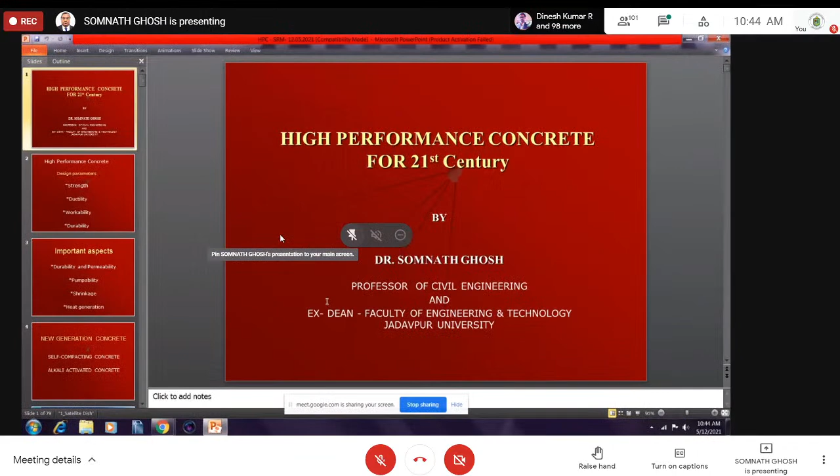Just a moment. Start, sir. Thank you, sir. You can start now. I have to first share... Can you hear me? Yes, sir. It is visible, sir. You can put it in slideshow mode, sir. I'll do it. It is now visible correctly. Thank you, sir. You can proceed, sir, please.

Thank you very much. Thank you to SRM University, because basically this college is under SRM University. When Professor Prabha requested me to deliver a lecture, I accepted it because I know that SRM is a good group and they are doing good work. Let me participate in an event with them.

Now today, basically I'll discuss high performance concrete. And frankly speaking, my focus will be towards the 21st century.

Now, when we are talking about high performance concrete, we really consider these parameters. There are many parameters, but out of all the parameters, these are the most important: strength, ductility, workability, and durability. These are the four parameters you all know. But many times we don't consider durability or ductility. We only concentrate on strength and workability, even in research.

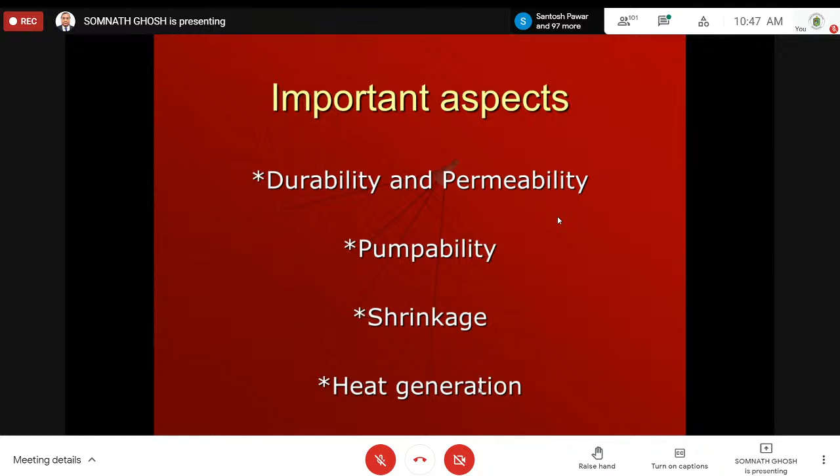Now, when we talk about new generation concrete at the present moment, we normally refer to self-compacting concrete and alkali activated concrete. There are other types of new generation concrete also, but today I'll just discuss these two areas.

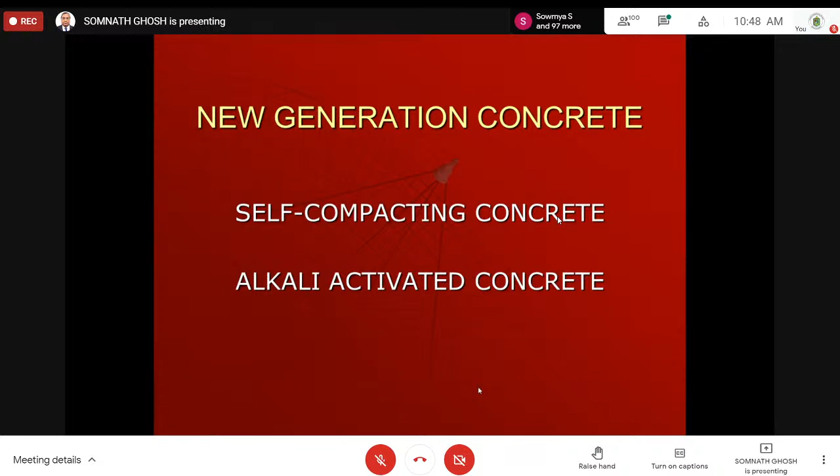Now, first, self-compacting concrete. Many of you have heard about it - what is self-compacting concrete. You all know that where the reinforcement is extremely congested, it is very difficult to compact the concrete, even using high pressure.

So in that case, if you can place a quality of concrete which can easily go through the gaps between the reinforcements, even if they are small - because in many situations you will find that at the column-beam junction, the stirrup spacing is maintained at 75 millimeters to make it earthquake resistant. But if the concrete is not going inside the joint, then whatever you do for the remaining part of the structure, your purpose will not be served. So definitely you have to pour the concrete in such a way that it goes to the inside portion of the beam-column joints and other portions also.

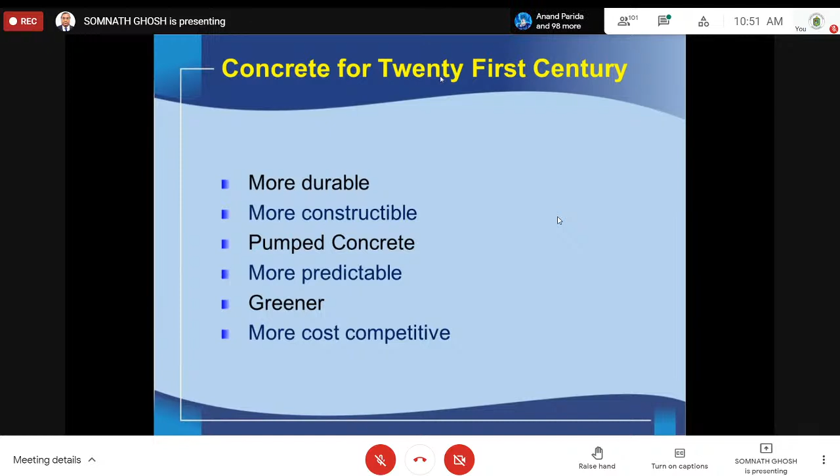Then it should be greener, because the process should be such that carbon dioxide emission and other things can be avoided, and more cost competitive. Because whenever we go for this kind of concrete, it is in everybody's mind that the cost will be more. That is the challenge you have to accept, and you have to make the concrete cost competitive.

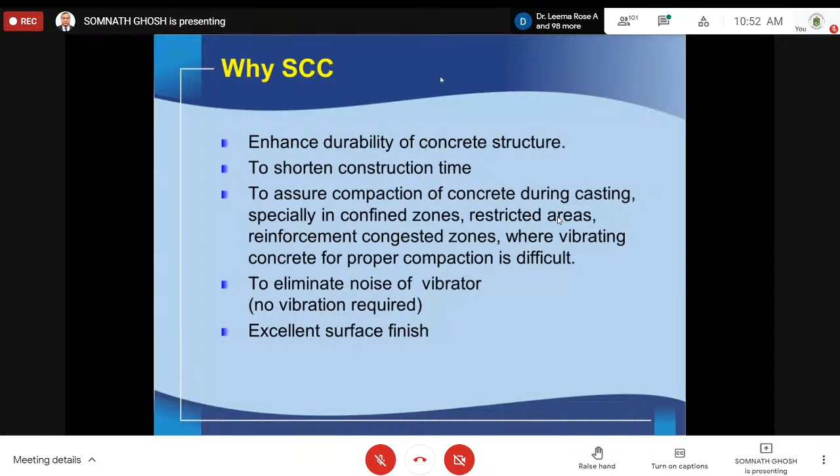Now you see, if the durability is enhanced, obviously it is welcome. And if you pump the concrete and take it to a particular height, like you are supplying water, you can just place the concrete, no vibration is required. So it shortens the construction time. In confined zones, restricted areas, reinforcement congested zones, this kind of concrete is very good. As there is no vibration required, there is no noise problem. And at the end of the casting, you can finish everything properly. Surface finish will be excellent.

So the economic consequences: constructability is important, predictability is important, then controllability and increased service life. Constructability, obviously, when I gave you the example of high-rise buildings, there you have to make the concrete in such a way that you can pump it to the highest level. This kind of concrete is very complex.

Even if the water cement ratio is slightly different from what you recommended, in that case you won't get that. So before you produce it, you must be able to predict its workability, strength, and other engineering properties properly. So predictability is important, not just trial and you are doing something. No.

Controllability, obviously, and if you can go for a highly compacted concrete, then the aggressive agents in the environment will not be able to penetrate through the concrete, and the service life of concrete will be more.

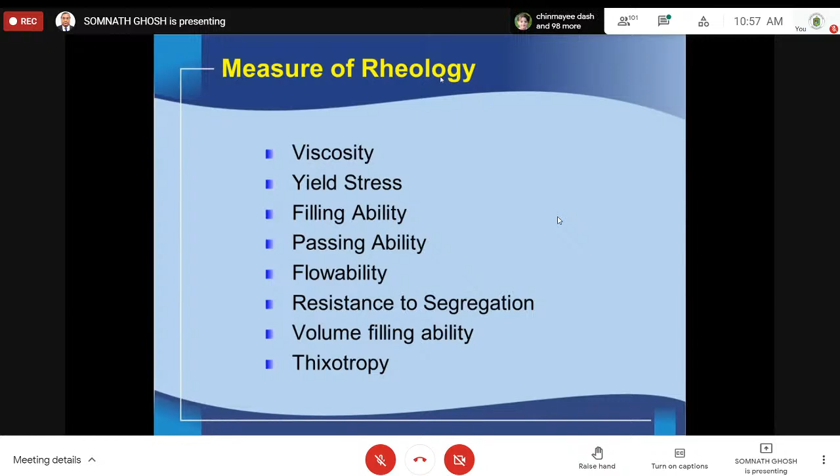Suppose when concrete is flowing, fresh concrete, at the same time setting is also taking place. So as time goes, the workability of concrete is also reducing. But at which rate? How can I define that? Whether the workability is reducing very fast or low - this kind of thing you can express in thixotropic terms. I'll discuss this. Now you see this composition of self-compacting concrete.

The mineral admixtures like fly ash or silica fume are added. Then water must be there. Chemical admixtures, as you all know, many different types are used - high range water reducing admixtures, superplasticizers, and most important, viscosity modifying admixtures. Fine aggregates, obviously, and coarse aggregates. So these are the basic ingredients in self-compacting concrete.

But don't think that whatever you are seeing in the slide is restricted to that only. There are many things, but it's not really possible to discuss everything within one hour. My ambition or objective is to give you an overall idea so that you can think about it, go into the detail of it, and then slowly you will be a master in this particular subject, and you can work with many people and develop many things.

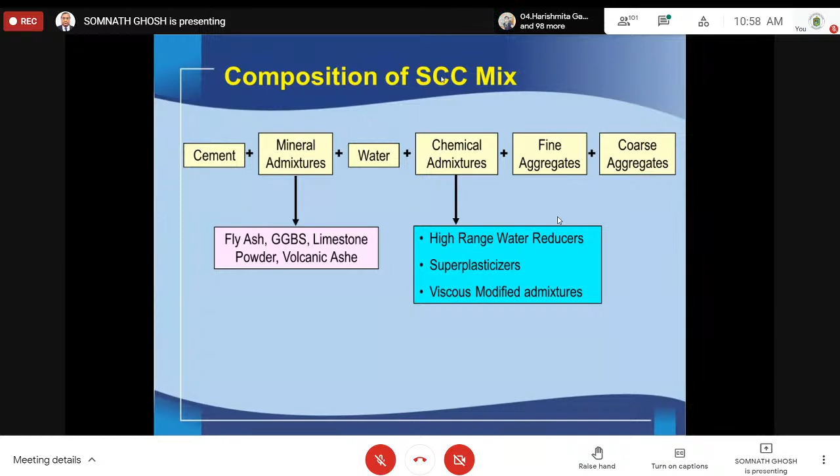Now you see the composition - I told you that powder, the fine aggregate below 90 micron. If you go for very big particles, it will not always give you self-compacting concrete. Now even micro mortars, we are going for self-compacting - particles like below 125 micron. And other things, water and admixtures are there.

Now try to understand the fundamental approach towards achieving self-compacting rheology. You are limiting the coarse aggregate content, so it is related to segregation resistance. The superplasticizer you are using gives you fluidity - it has relation with segregation and relation to fluidity. If the material is segregated, you can't use it.

Then if you go for a very high water cement ratio, you can't really produce cohesive concrete - it will be segregated. Naturally, if you take all these things together, they interact with each other, and only then can you achieve self-compactability. Otherwise you just can't, because here it is just like a fluid. Concrete is just like a fluid - the slump etc. you can't compare to conventional concrete.

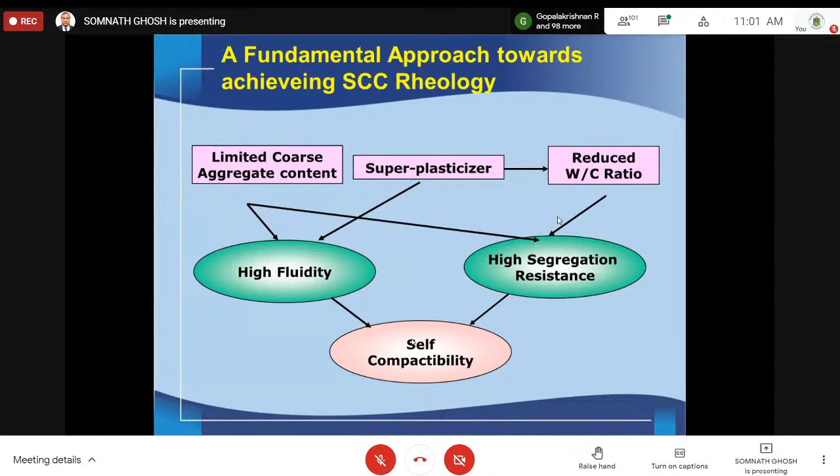Even if you can't measure slump, it is just like fluid. But you will be able to achieve it at a very, very low water cement ratio. Obviously superplasticizers and viscosity modifying admixtures have a very important role. So you have to procure these things and cook it properly - then only will you be able to achieve self-compactability.

Now the aggregate - size, quantity, shape, spacing, interparticle separation, combined aggregate packing - all these things are very important. Try to understand that normally the particle size of coarse aggregate is bigger than fine aggregates, and the particle size of fine aggregate is bigger than cement. Again, the particle size of mineral admixtures like silica fume is much less than cement.

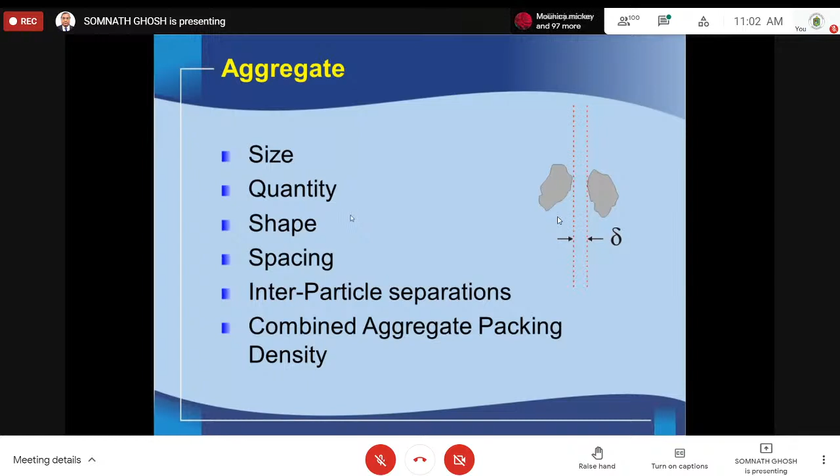So what is happening - the interparticle gap between the coarse aggregates is taken up by sand, then the interparticle gap between sand is taken up by cement, and the interparticle gap between cement is taken up by these mineral admixtures like silica fume. In this way you will be able to achieve a very dense concrete. That is what I am saying - packing, which you can express in terms of density. These are very, very important aspects, normally not really discussed or understood or used properly.

Now these are very important aspects - superplasticizer, obviously high range water reducing superplasticizer, viscosity modifier, microfine particles like silica fume, fly ash etc., and low water cement ratio, low. If you go for high water cement ratio, you will not be able to achieve self-compacting concrete.

It's a tailor-made concrete. Why tailor-made? Because your client may ask for a particular strength, particular workability, particular durability, and many other aspects like pumpability, and you have to develop accordingly.

So obviously, hand mixing is not at all possible. If you try to do it by hand mixing, you will not be able to achieve self-compacting concrete. So use of a mixer machine is very important.

So you see, when people are coming to a particular person for mix design in the profession, one can provide a mix design at a very low consultancy fee. But when the requirement is different, like self-compacting concrete with pumpability and other things, obviously that person should be a real expert, and maybe your consultancy fee will be more. But the advantage is that with a little bit more expense on the consultant, you will be able to achieve a much better concrete, which ultimately will benefit you.

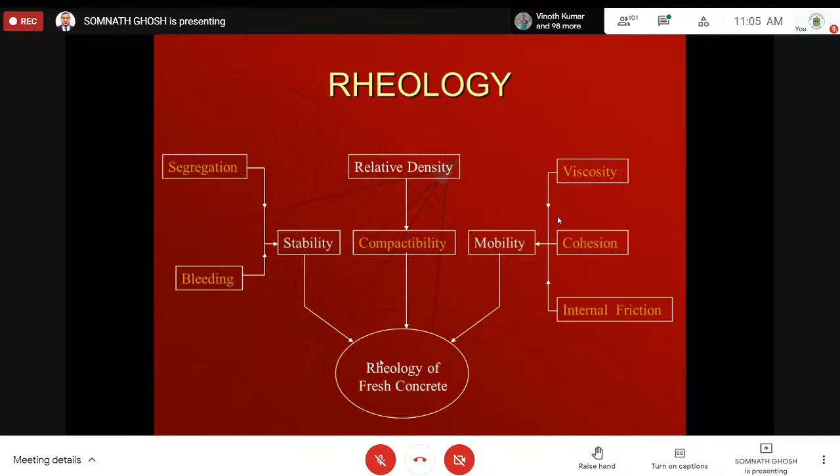Now the question is that when we go for normal concrete, then the minimum cement content is specified in the code. But when you are going for this kind of high performance concrete or self-compacting concrete, then you are adding fly ash also, and many other things. Fly ash indirectly is also a kind of binder, contributing as binder. So that you all know. So this is just an example.

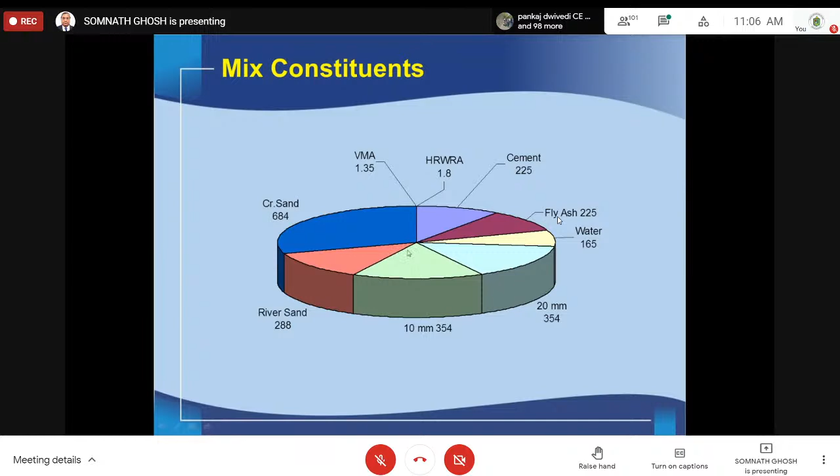Now you see, you have to measure the rheology in the field and also in the laboratory. Then the slump flow or T50 flow, V-funnel, T5 minutes, J-ring, U-box. There are about 10 such methods which are normally used in research, in the laboratory. If you consider the rheological aspect in detail, it may be much more than that.

But at least in the laboratory or in the field, you have to use these 4 methods. This method gives you filling ability. This particular slump flow method is also filling ability, J-ring for passing ability, V-funnel, like that. So these are the different tests, and they are giving you these properties, which are very important.

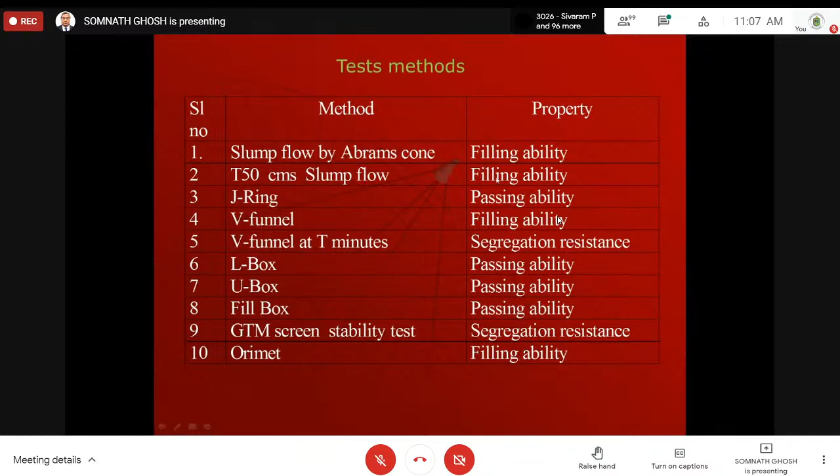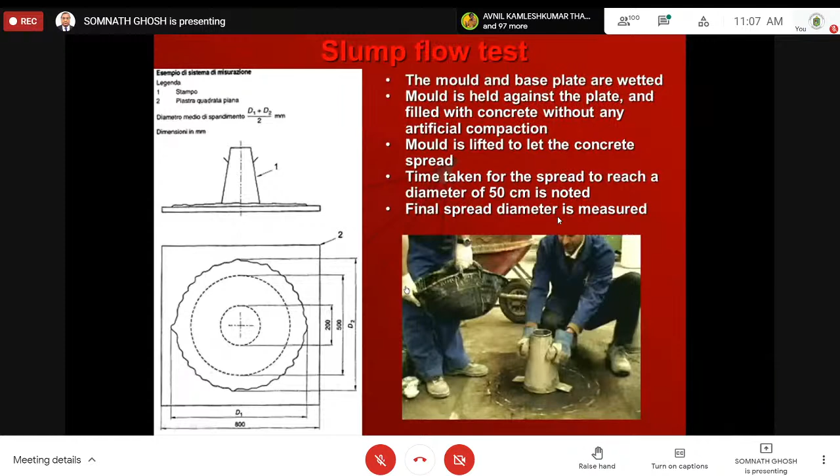And you see, this is a kind of test, the J-ring test. It is very similar, these kind of vertical rods are provided as if the concrete is passing through the reinforcements. So this is the cone, you are filling the concrete here, and then when you are lifting it like this, then the concrete is flowing, passing through these vertical bars, like reinforcements. And ultimately what is the flow that we are measuring? What is the diameter of the flow that we are measuring?

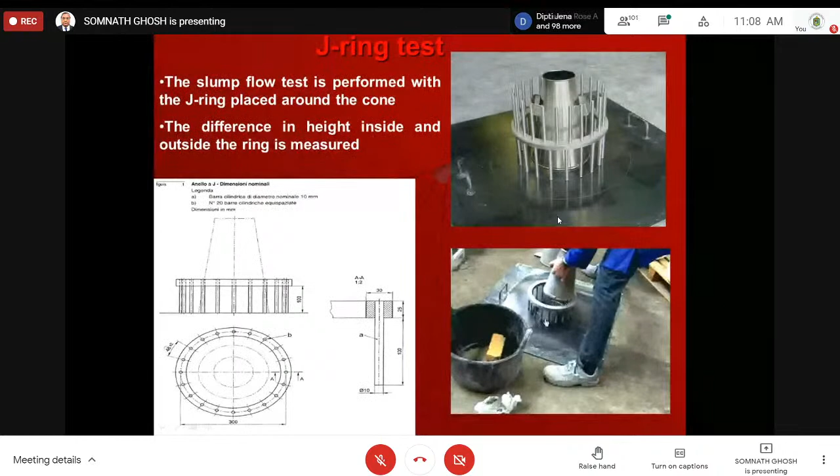Now you see, this is another kind of test, the U-box test. If you block it here and fill with the concrete, and then you remove the shutter, then what will happen? It will come this way. But if it is water, then both the levels are same. In concrete it is not like water, so there will be some difference. But if the difference is less, and if the concrete is cohesive, that means it will give you the self-compacting property. So this is another kind of test.

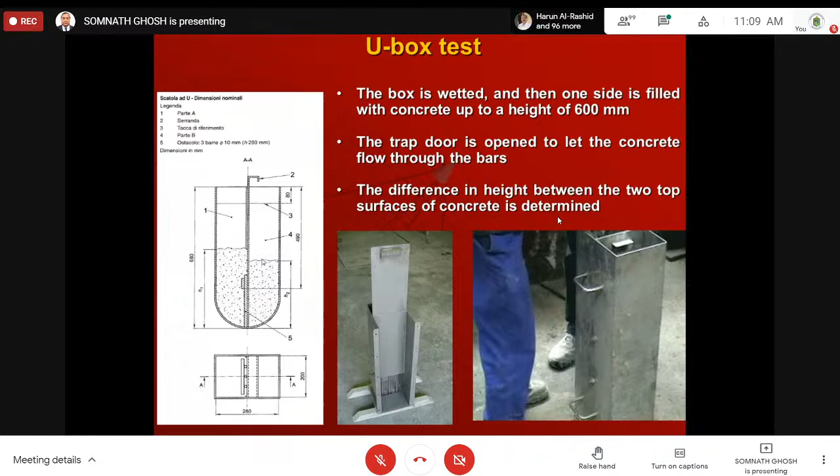Now you see, we have tested several mixes in the laboratory for so many years, because I am in this profession for 40 years, and our particular concrete technology group is very strong in the country. So these are the tests we conducted long back in the 90s. At that time we achieved all these things. Now it is even better.

So you see, this is the coarse aggregate, fine aggregate, then the GGBS slag, silica fumes, metakaolin, like that. I have given you the quantity per meter cube, and the superplasticizers, viscosity modifying admixtures, how much. So like that, there are different types of mix, C0, then FL2, FL1, right? So if you go through this slide, you will understand that I have changed these quantities.

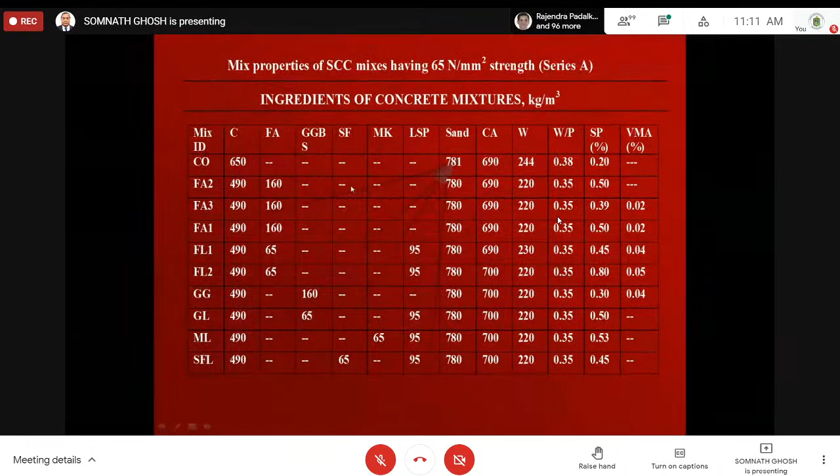In many places I have not used it. Ultimately, this particular test I did in Series A, and again with that knowledge, we went for Series B - S1, S2, S3, different kinds of mix. All these things are varying, so you can play with it. Ultimately, at that time, we could produce up to M60. Now we can produce even higher strength of concrete.

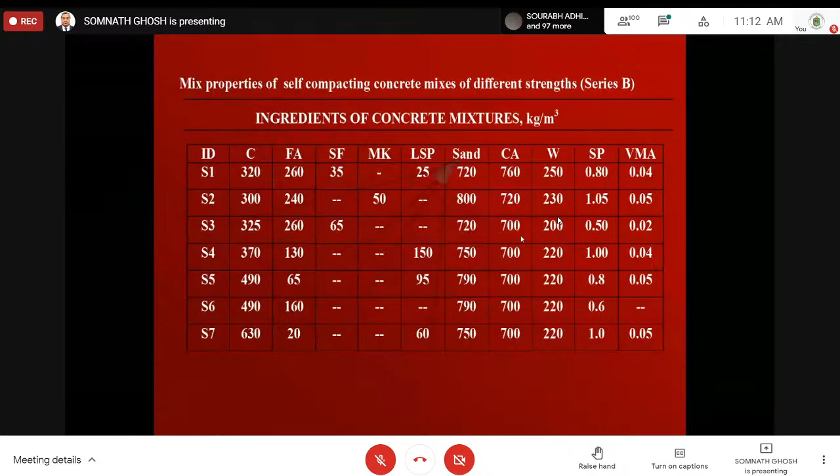If you're expecting very high strength, then there are other problems also coming. You have to take care of those things.

When we are trying to achieve self-compacting concrete, you have to understand the compatibility of the ingredients - cement, sand, stone chip, admixture - and whether they are compatible or not. If every member of a group is very compatible with each other, that group becomes very strong. Same thing here.

We are not checking it - we are using a particular superplasticizer or viscosity modifying admixture with a particular type of cement, and it is not compatible. So a particular type of cement is compatible with a particular type of viscosity modifying admixture or superplasticizer. You have to first understand whether the ingredients are compatible, then select them accordingly. Then all the ingredients are compatible, and it will give you a very good self-compacting concrete, just like members compatible with each other make the group very strong - the performance will be extremely good.

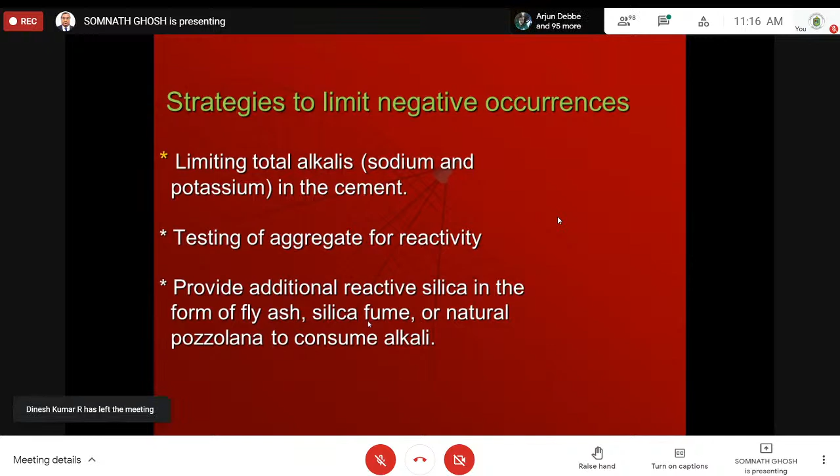Now, other problems: inadequate compaction resulting from segregation, micro cracks resulting from shrinkage and thermal stresses - you have to be very careful of these, otherwise there will be huge shrinkage cracks initially. Then bleeding is another problem - if you keep the concrete in a particular place, you will slowly find that even if you do nothing, water is coming out from the concrete. The concrete should be able to hold the water given to it; if it comes out, it will become harsh.

Then volume of pores and capillaries is to be controlled, then distribution of pores and their discontinuity. If there are pores and the pores are not interconnected, that is bad. It happened at the Eurotunnel that the concrete was very good, high performance concrete, but the interconnection between pores was not there.

As a result, when the temperature rose to a great extent due to a fire, the water entrapped within the concrete produced vapor, and that vapor produced huge pressure inside the concrete, and ultimately the concrete burst. That happened to the Eurotunnel a long time back.

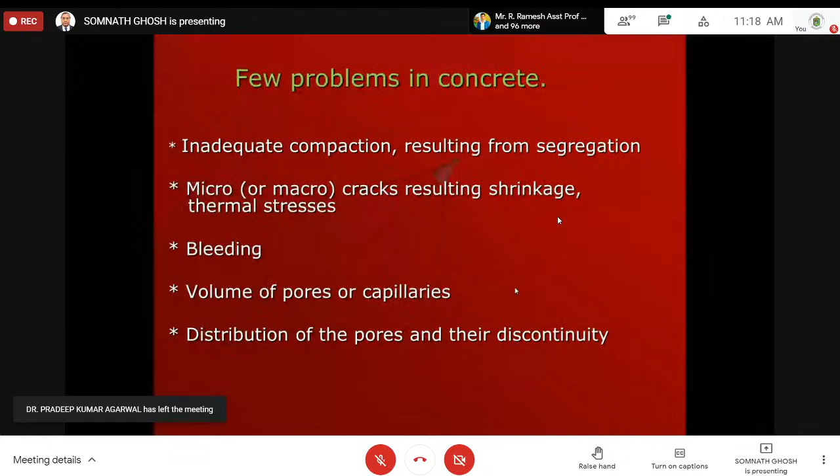Now, the reduction of permeability - if you can reduce the permeability, that means the durability will be more. Suppose the concrete is in a saline environment, or in an acid or alkali environment - if those things try to percolate through the concrete, and if it percolates, then what will happen?

The bond between the aggregates will be disturbed, the interfacial zone will be disturbed, and if that interfacial zone is disturbed, everything is disturbed. So the property of the interfacial zone actually contributes to the property of concrete. If concrete is ductile, the interfacial zone is ductile. If the concrete is of very high strength, then the interfacial zone is of very high strength. The particle size at the interfacial zone is very, very small, at the nano level, so you have to understand the interface.

So earlier people did research on concrete and mortar, now people are doing research on the interface. Not now, long time back, researchers knew that if they could improve the interface between the particles, that means they are actually improving the concrete properties.

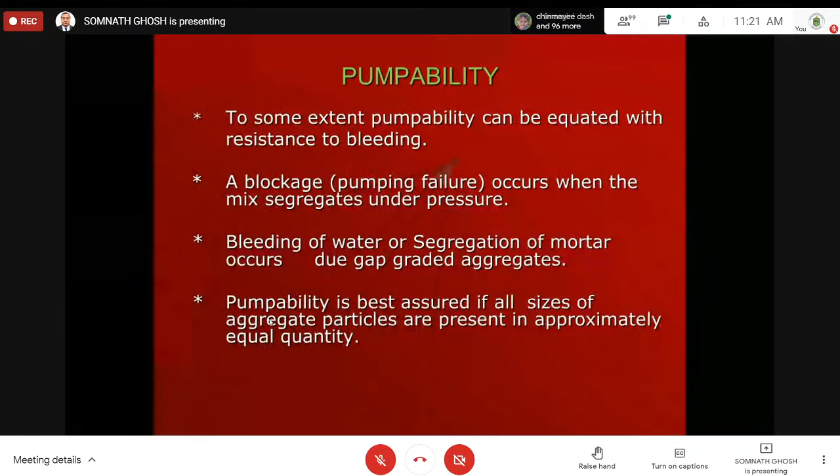Now you see that you will be able to produce a very good pumpable concrete if all sizes of aggregates are present in the concrete more or less in equal quantity. I'm not saying exactly equal, but more or less. That will give you packing, and you will achieve cohesiveness through use of viscosity modifier admixtures. You can also reduce the water-cement ratio by using high range water superplasticizers. So all these things you can do. Keep this in mind.

Shrinkage also, drying shrinkage and carbonation shrinkage, you don't want it. You have to take care of the aggregates and also the paste. That's very important. You cannot allow loss of water because that will lead to high shrinkage. Shrinkage is largely dependent on total quantity of water in the mix; if it is less, shrinkage will be less. Also the modulus of coarse aggregate and proportion of aggregates matter.

Now gypsum content of cement influences shrinkage, obviously. So in one way gypsum is helping, but in another way, its presence is not good for concrete properties. So there should be a limiting quantity of gypsum.

If someday I discuss with you only about cement, only about the basic aspects of cement with the reaction mechanism and all, then you will be able to understand better.

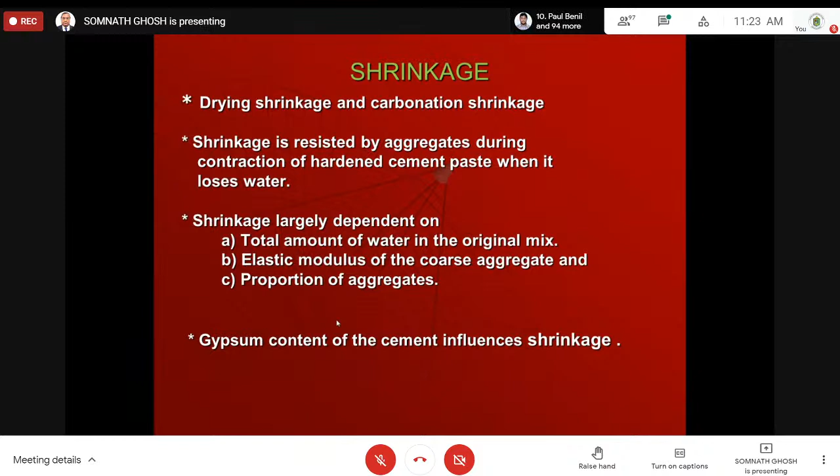Now let us discuss another thing which I told you initially, which will be extremely popular in the 21st century. It has already become very popular in most countries, in Australia, USA, Britain, Ireland, everybody is using it. In our country also, people started using it, manufacturing many things. But still, I must say we have to take it forward in our country. I know many persons are working on alkali activated composites in your university also.

Now you have to understand sustainability, and then you will be able to understand why this change is required, why normal Portland cement could be replaced by something, in order to achieve sustainability.

Now you see that the limestone and all these processes, ultimately what happens? It liberates carbon dioxide. There is some figure given, in energy terms some figure given. But ultimately carbon dioxide liberates, which you don't expect, which you don't want, because global warming is because of the liberation of carbon dioxide. We have to limit it.

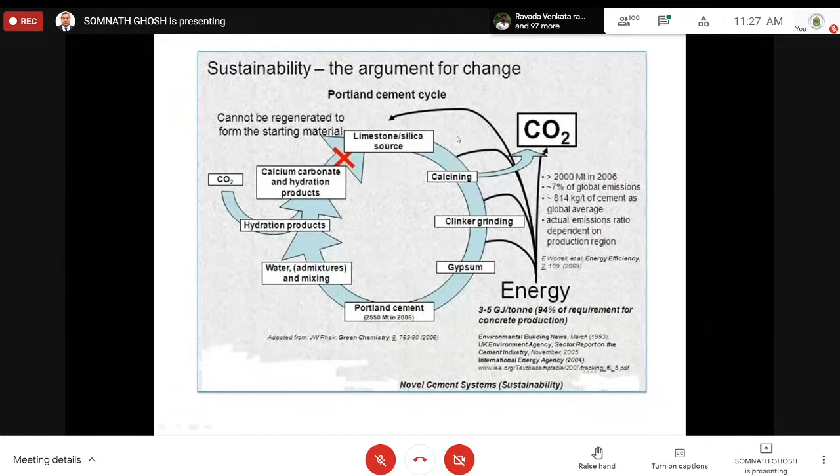Now, the alkali activated composite, what it is, I'll tell you. Initially, this is proposed by a very renowned professor, Professor Davidovits. But initially, he worked in different areas of material, not exactly in cementitious material. He started with other kinds of material, not cement-based materials or cementitious material like we are using, civil engineers are using. Later on, he has contributed in those areas also.

And if you go to Google, you will find another name, Provis. He is a professor in Sheffield University, UK, and he has also contributed a lot, right?

I'll discuss these persons because this is the kind of thing - even throughout the world, very few persons have real contribution towards this particular subject. Even very good books are not always available, right? So I'm telling you that you can contribute a lot in this subject.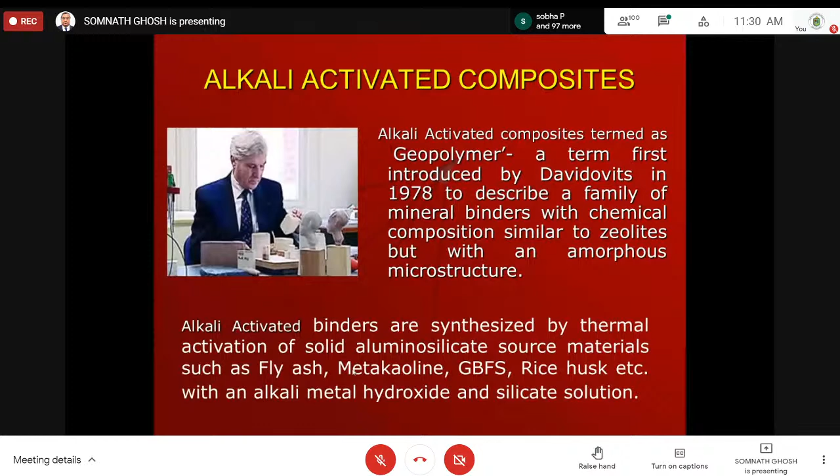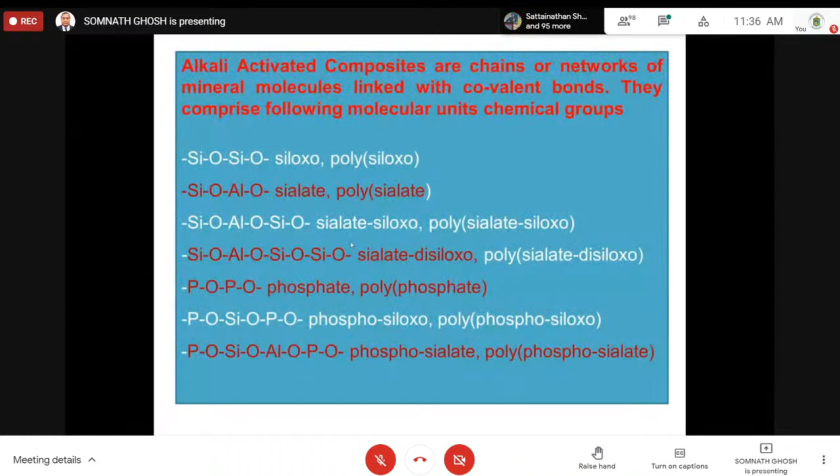So this entire process takes place - it's very easy to understand. Those who are interested to work in materials, in concrete, I think they can do many things - they can just play with it. So this is the process involved in alkali activation.

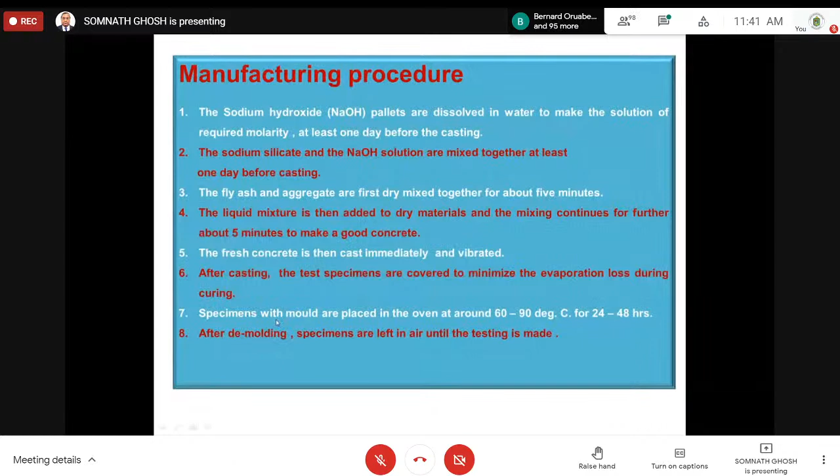Of course, we are not doing it now because of other problems - in winter it's different, in summer it's different. You can do it 3-4 hours before casting. Then fly ash and aggregates are dry mixed together - dry mixing. Then you add all these things slowly. Finally, you place it in the mold, and after a few hours, or maybe after 1 day, you can take the specimen from the mold, and depending on requirement, put it in the oven at 60 to 90 degrees centigrade, maybe for 24 hours, maybe 48 hours. All these things I'll tell you in detail - this is the manufacturing, very simple, very simple.

Then the tests are carried out: bulk density, workability, initial setting, sorptivity, UPV, direct compressive strength, MIP (not normally used, but required here), XRD, XRF, and scanning electron microscope. These microstructural studies have now become compulsory in research. You have to do it, otherwise you can't convince the industry people, as they will ask you several questions you won't be able to answer.

Now, I'll just give you an overview about it. But I have written 3 books on this subject available on Amazon, and a recent book published by one of our very bright research scholars, Kushal Ghosh, with CRC, Taylor and Francis group. He has concentrated on fly ash and slag, but you have to go through those books if you want all these details. Everything is given there, many other things I won't discuss here. Within a year, I expect to give you one more book on blended geopolymer and blended alkali activated composite.

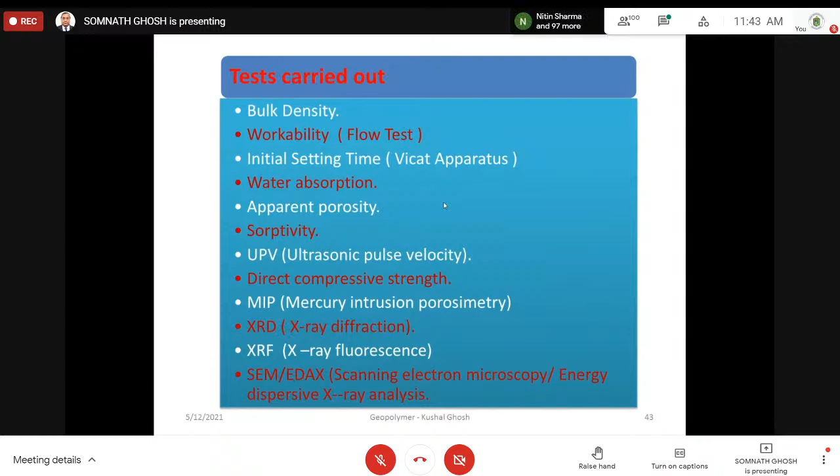Now, this sorptivity test indirectly gives you an idea about the absorption of water through capillary action. Unless you know about the porosity and transmission of water through capillary action, you won't understand how saline water or acid will attack the reinforcement inside. The concrete must be good, the cover must be good, so that it should not be able to attack the reinforcement inside.

This is a very good subject, but I'm not going into detail. I'm just referring to this ASTM code. We have developed methodology and have several publications in ASTM.

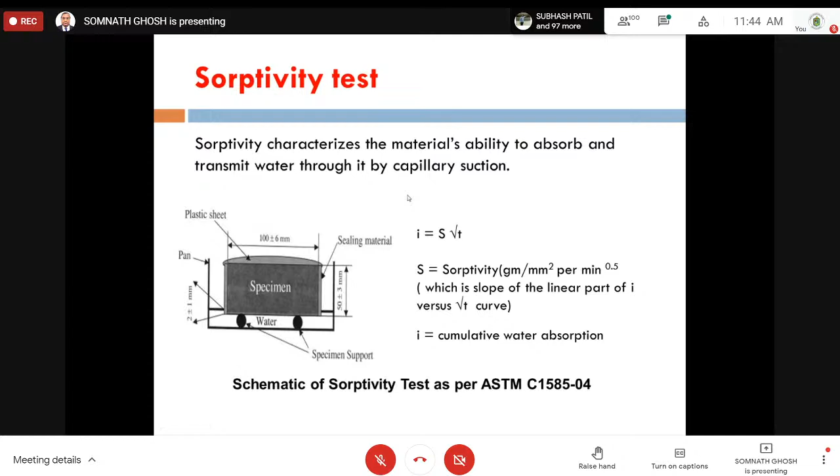If everything goes all right, within a year you will get one more book, where I have related durability, strength, and all these things with sorptivity and absorption of water. These things are very important - unless you understand this, you will not be able to assess durability. We have even developed a model for the durability index, because these are the questions you have to answer to industry people, otherwise they will not accept it. They will not go into the detail of reaction mechanism, but they have their own way to understand whether you are guiding them properly or telling something rubbish - they have that level of intelligence.

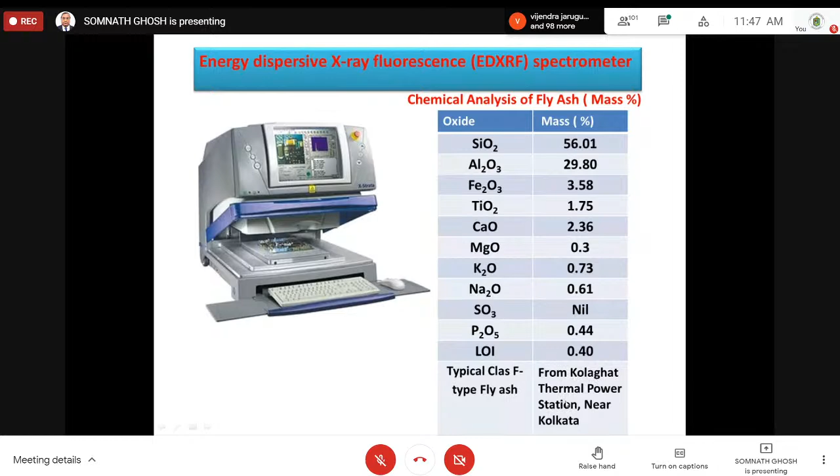So in Delhi, one company is manufacturing this, and they are in regular contact with me. Now you see, this is the chemical analysis which will go for EDXRF, and you will get the oxides and how much mass percentage through this instrument. It's a very sophisticated instrument - you may not have it in your civil engineering department, it may be in some other department or a central facility. Doesn't matter, you go there, give them a sample, and they will do it for you. This is just a result when I used the fly ash from a Kolaghat thermal power station near Kolkata.

UPV, you all know what this is. Here I must tell you that when you get this velocity around, say, 4.5, you say it's a good concrete. But in case of alkali activated composite, you won't get that high a value compared with normal concrete. But still we are claiming it's better - it is dense.

Its durability is high, everything we are claiming is better. Why? Because due to the polymeric reaction, the material cannot be compared with normal concrete. So due to this polymeric change, or the presence of polymer, whatever it is, the pulse velocity decreases.

Pulse velocity is very high in case of metals like steel, copper. But for synthetic material, polymeric material, it is less. But polymeric materials are better. So that's why the kind of ultrasonic pulse velocity test needs to be done, and you have to say that yes, even if you don't get 4 or 4.5, even if you get 3, 3.5, it is good because it is polymeric in nature, showing you less value.

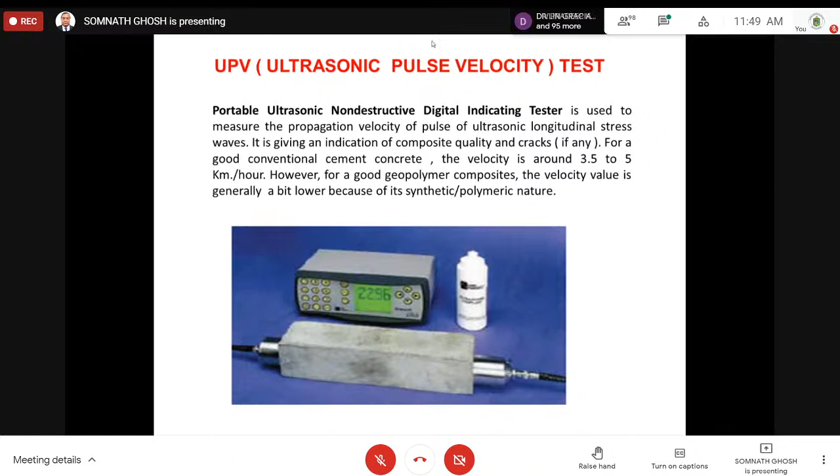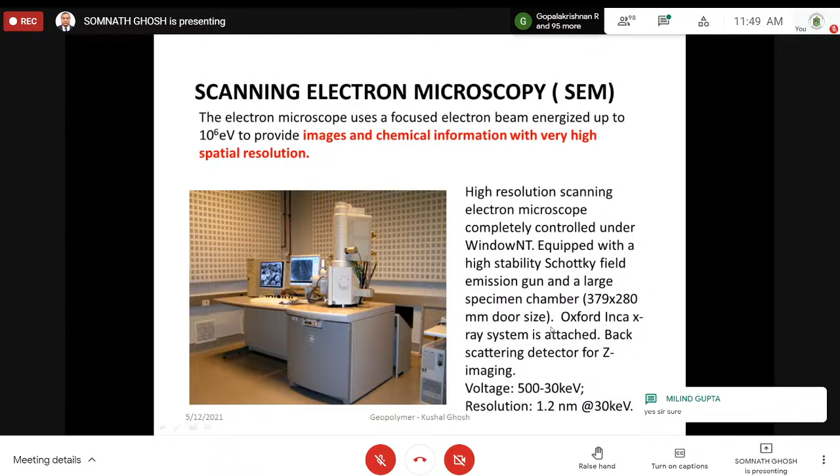Then scanning electron microscopy, this is also maybe a central facility, right? You can understand the microstructures depending on the resolution of the scanning electron microscope. Now you see, just see the microstructure of alkali activated binder.

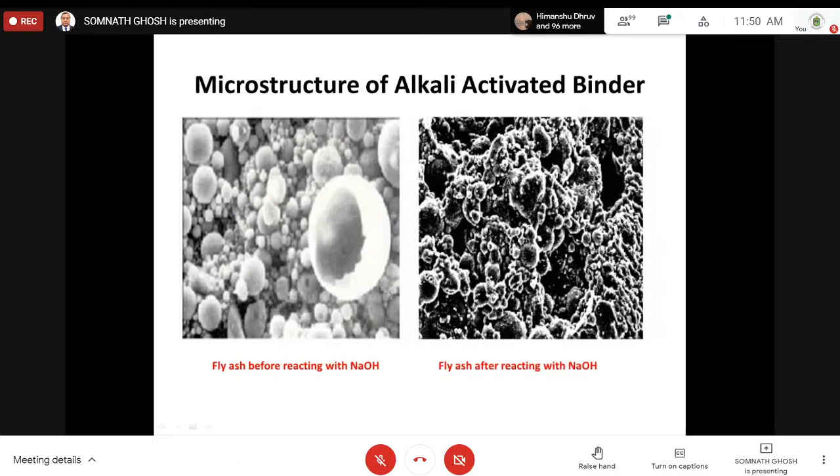See, fly ash before reacting with sodium hydroxide, it is like this. The moment it reacts with sodium hydroxide, it becomes so dense. After formation of gel and all, it becomes so dense, right? These things you can only understand through this scanning electron microscope. Otherwise, you will not be able to understand the microstructure.

Now you see here with different sodium to alumina ratio, one is 0.46, another 0.62. At 0.62 it's much more dense. So from your result, you will get that it will absorb more water. That means the micropores are there much more compared to this. So if this changes, how the microstructure is changing, that one should understand.

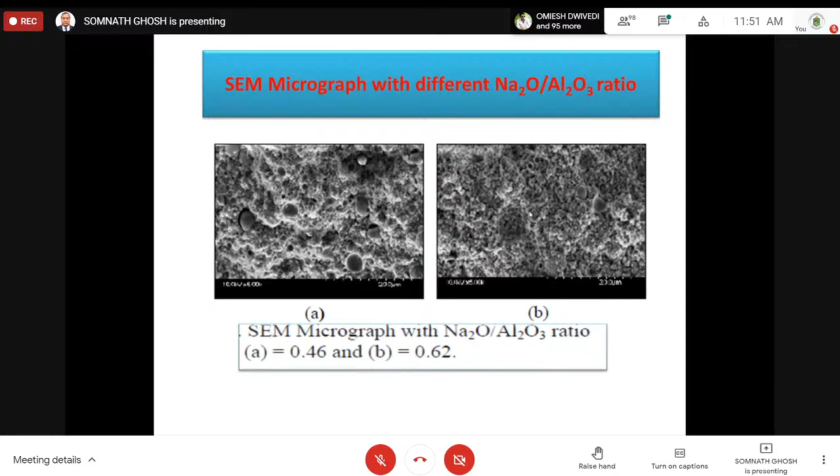That is why this kind of test is very important. And I must say that slowly in concrete technology courses, the microstructural part, you should make it compulsory. Nowadays, if you try to publish any paper in very good journals without microstructural study, the paper will be rejected. You won't be able to publish in most of the journals.

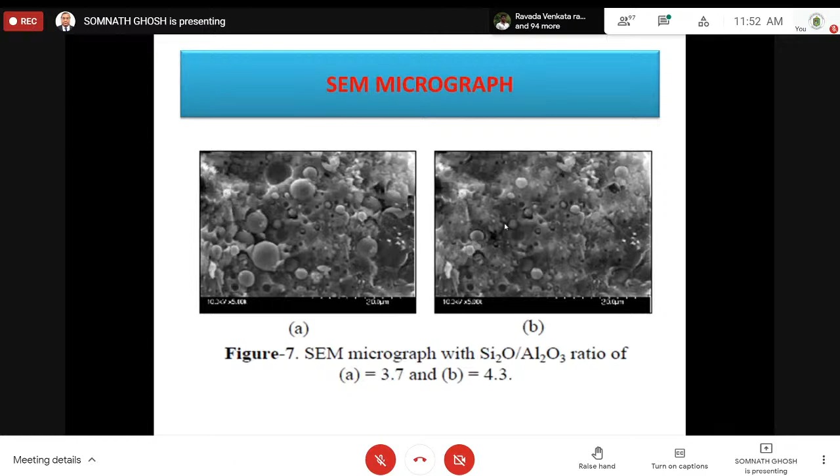Similarly, you see that silica to alumina ratio, if you are changing from 3.7 to 4.3, it is becoming... So these are the things, unless you go for microstructure test, scanning electron microscopy, you can't be able to understand. See, these are the things, right? And the corresponding XRD results are there. So all the peaks will tell you which one is more, which one is less, like that.

Someday we can discuss only on microstructure, that will help you.

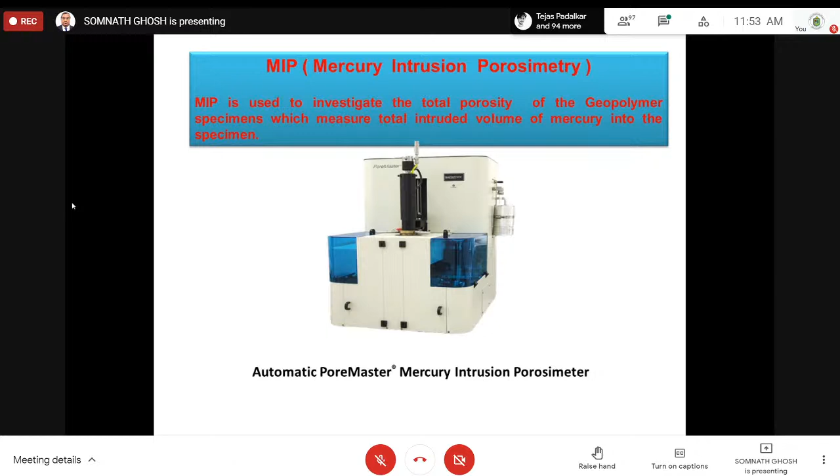Now another test we are doing, the mercury intrusion porosimetry, is very, very important. Very costly. You may have a central facility, but you will be able to understand. So MIP is used to investigate total porosity of geopolymer or alkali slag, which measures the total intruded volume of mercury into the specimen. What they do is try to intrude mercury by putting high pressure, and the mercury is going inside. They measure how much mercury is going inside, the volume of mercury, and from there they try to predict the pore volume, maximum pore diameter, etc. So this is the kind of thing.

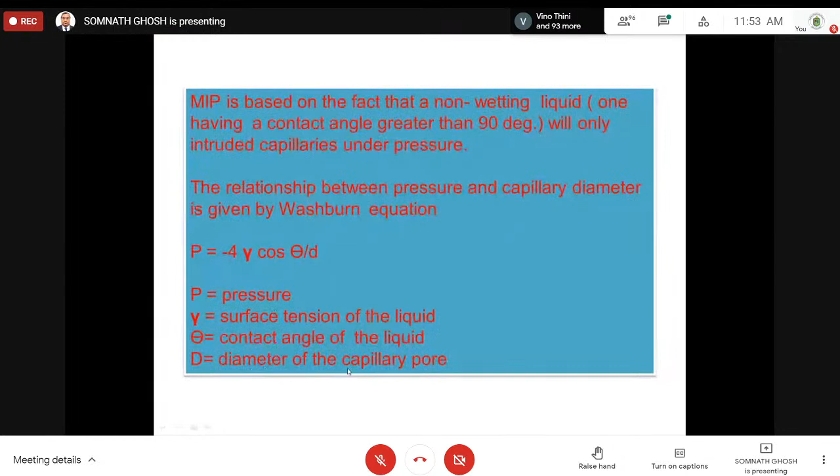MIP is based on the fact that a non-wetting liquid, mercury, having a contact angle greater than 90 degrees, will only intrude capillaries under pressure. And these relationships exist between pressure, contact angle, and diameter of the capillary pore, all these things can be related, right? Very easy, but only thing you have to be careful about.

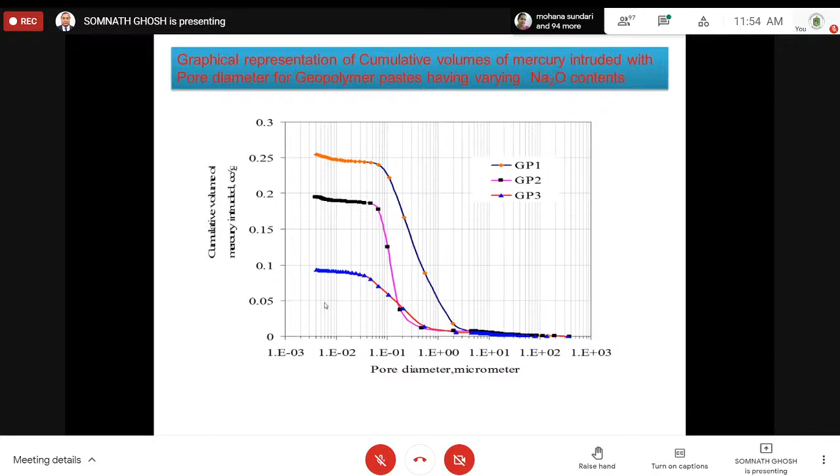At the end of the test, you will get a graph like this, in the computer it will come like this, right? So this is cumulative volume of mercury intruded, and this is your pore diameter. This will give you a very good idea about the presence of pores, pore diameter, and total quantity of pore in the composite. Everything you will get. Unless you understand it, how can you say why that particular material absorbs more water? Because more pores are there. But what is the pore diameter? What is total pore volume? So all these things are very important.

I must be sure whether geopolymeric reaction is taking place at all. Long back, when people added alkali and sodium silicate to slag, blast furnace slag, they used to call it geopolymer. But throughout the world, people said, why are you calling it geopolymer? Why is the polymer term used, because no polymeric reaction is taking place? This happened to me while publishing a paper in ASTM. I went for an NMR test, and through that test, I found there is no trace of polymeric reaction when blast furnace slag and alkali silicate react together. So you must be sure there is a polymeric reaction before telling people that. That's why I now generally use the term alkali-activated.

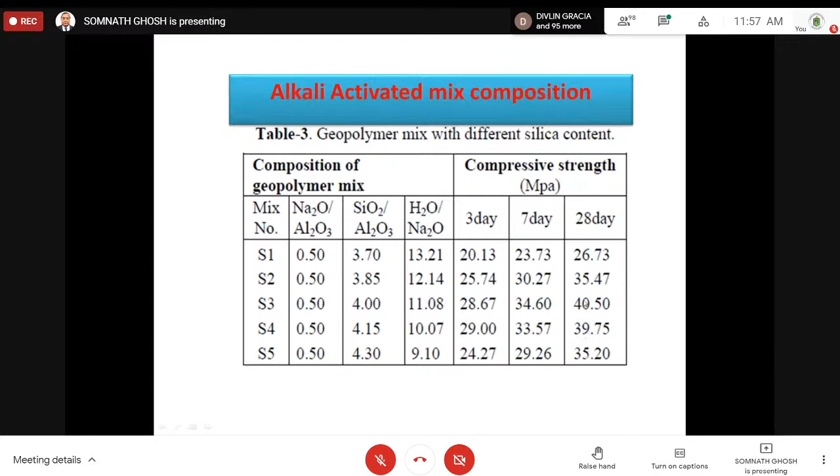Now you see, these results are quite encouraging. With fly ash, alkali and silicate at 28 days, see how much strength you're getting. This 40 you can also get after 3 days of heat curing. See another set, another set, here also you're getting 35, 39, 40. Quite good. Of course, I have varied these parameters.

We don't have time to discuss all this in detail. Alkali content is expressed basically in terms of this ratio. 85 degree temperature we found best, for 48 hours, with silica content 4%, meaning this ratio is 4. If you change it, the compressive strength increases. See, there's 7 - that's the result I showed you in the graph earlier. It has gone up to nearly 50.

This is the water-to-geopolymer-solid ratio, meaning fly ash, or if you use fly ash and slag together. At a particular water-source-material ratio, you get very good results, but beyond that it decreases. You have to be very careful about the water-solid ratio.

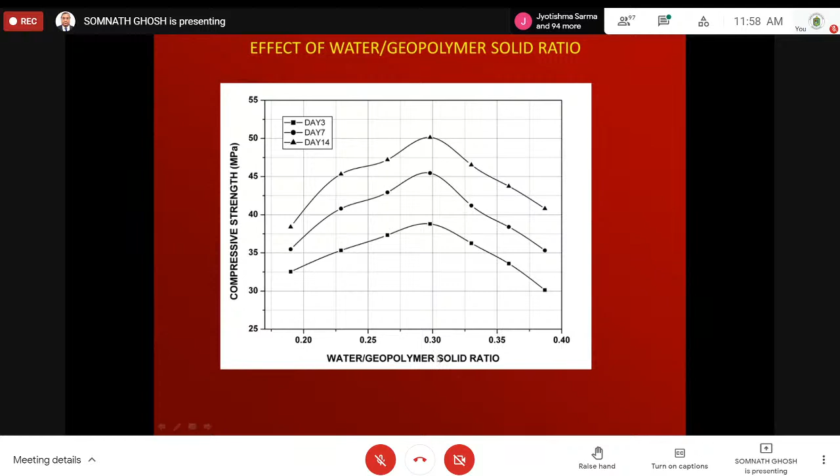This is the sand-to-fly ash ratio in the composite. If it is reduced, you get higher strength. You are getting higher strength - obviously.

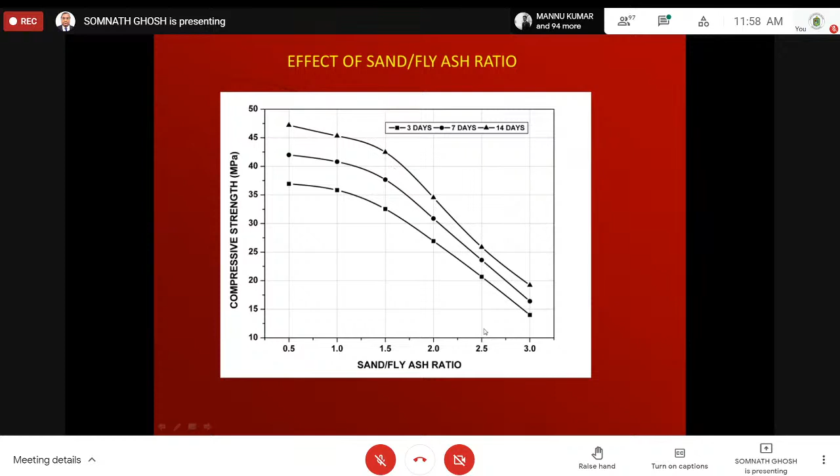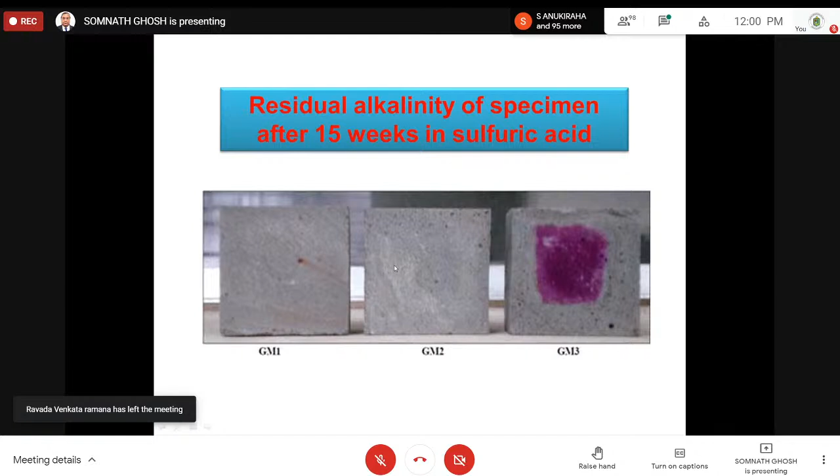If you try to understand the alkalinity of the specimen under sulfuric acid - because acid reacts with the geopolymer - here you see pink color. If you spray phenolphthalein, it turns pink, meaning there is some alkali present. But slowly the alkali vanishes - no alkali, it's consumed by the acid. It's good, so it is good against acid.

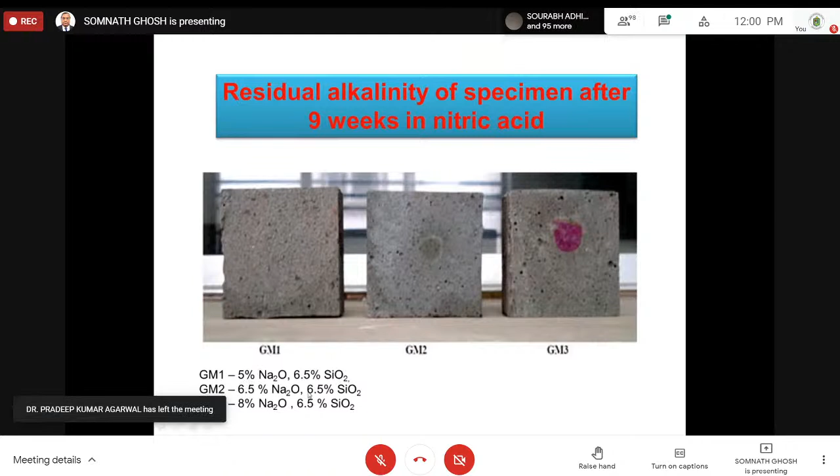This is after 9 weeks, then after that, after that. These specimens were made with different compositions. These are the tests you should perform. If you immerse the specimen in 10% nitric acid, the strength decreases over the number of weeks - 3, 6, 9 - we did it up to 24 weeks. Now people are doing much more.

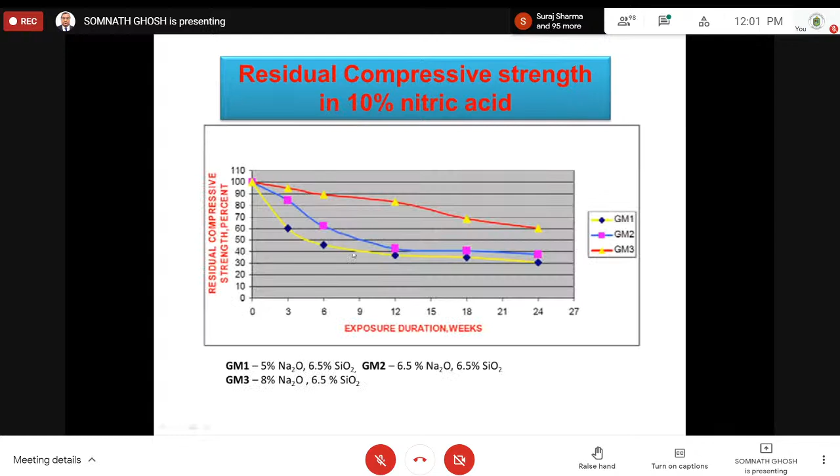Now this is with nitric acid - previously it was sulfuric acid, now it's with nitric acid. This is the weight change in the case of sulfuric acid.

Why am I showing you all this? Because you have to be very sure about your research program so that you can convince the industry people. Otherwise you will just be publishing a paper - you may get some credit in your promotion, that's all. But I never worked that way. Whatever I did in my 40 years of career, I always translated it to the industry. Otherwise, if you do it just for publishing papers, after some time you will not be happy.

Just with some observations, I'll close the lecture today. This is an observation we made in case of blast furnace slag: blast furnace slag paste composite activated by sodium silicate and sodium hydroxide can be produced at normal temperature with water curing - no heat curing is required. We have now produced this alkali-activated composite with slag and fly ash under water curing, because that is the demand of the industry. They don't want heat curing because it consumes extra cost - cost increases. They want water curing.

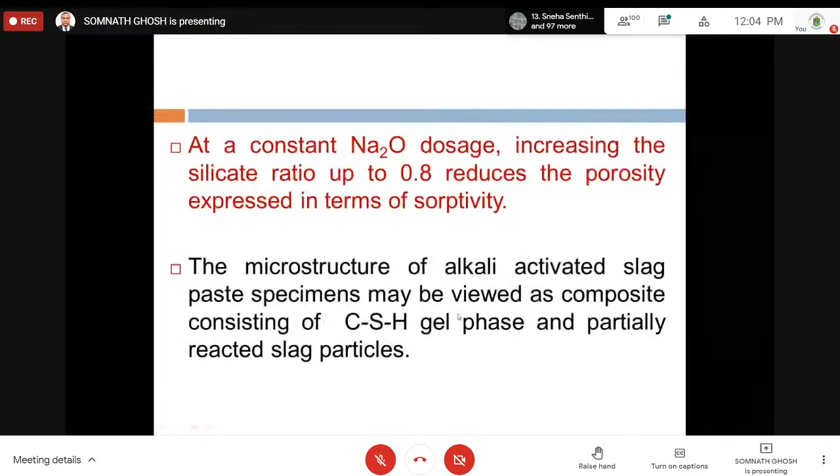Then all these things are relative doses. Increasing silicate ratio up to 0.8 reduces porosity in terms of sorptivity, which I told you. So these are the different types of observations which will help you just to read out. You will be able to understand it.

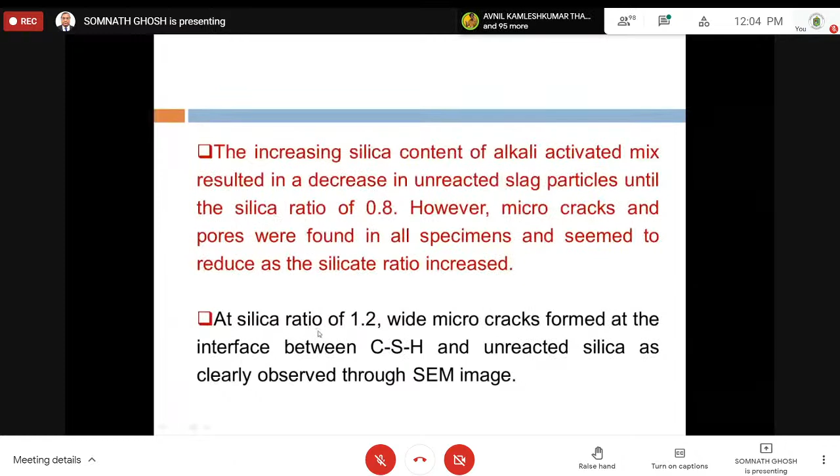Increasing silica content in this mix decreases this 0.8. Then again, at this silica ratio, wide microcracks form at the interface of CSH. That we have also seen in the microstructure study. It happens at these ratios, and that is a negative thing. Microstructure study showed that the pores reduced as silicate ratio increases to 0.8.

So all these things regarding pores, using Na2O or K2O, show how the things are changing.

You can use sodium hydroxide, you can use potassium hydroxide, but you will get different results. If you mix them in a particular proportion, sodium hydroxide and potassium hydroxide, you will get different results. Several things are there, several things. It is not really possible for me to describe everything here, but I'm just giving you glimpses. Those who are good in research or want to do something new will be very happy with this.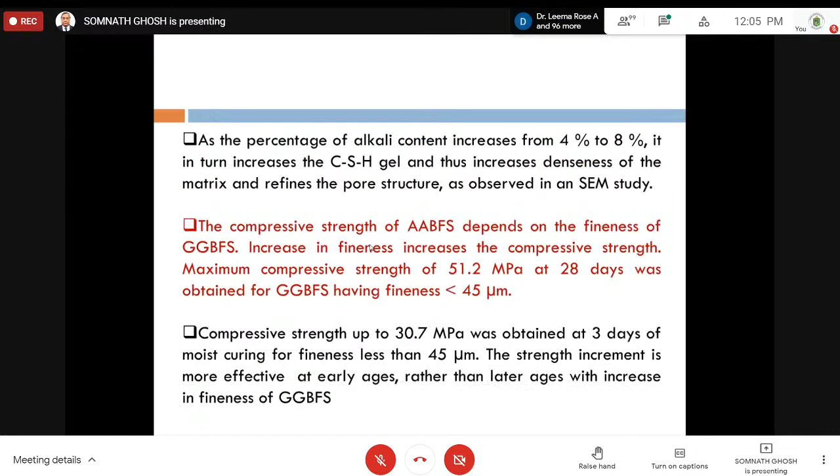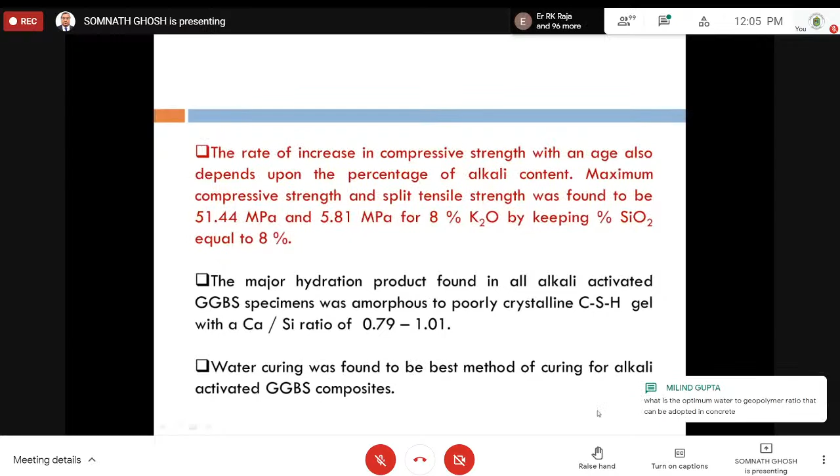So these things, tensile strength, then regarding calcium silica ratio, because calcium quantity is very high in such slag, and water curing we have found. So these are the different things.

So I'm really looking forward to blended alkali activated high performance composites. We have worked a lot on blended alkali activated high performance composite with 6 different types of source materials, combined together in different proportions and activated in different ways, with differing particle sizes, temperatures, and many other things we have changed to produce admixed blended alkali activated high performance composite.

And also we have got the prediction model, which I was telling you, we have not discussed here, but the prediction model is available in my book also, in my 3 books. And ultimately we want to get better alkali activated high performance composite just by blending different materials, not from a single source material, just by blending. And these are the things: engineering properties, durability, prediction model, reaction mechanism, and the appropriate testing method.

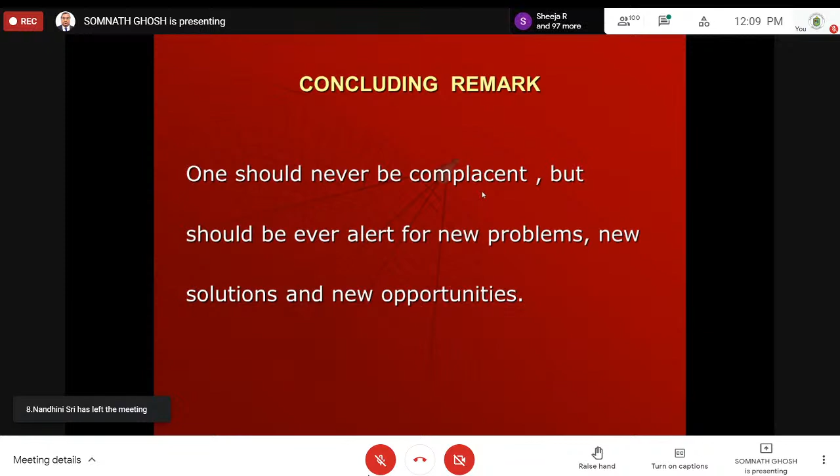Now, I must say that the SRM... Thank you, sir. Thank you, enough. There are some questions, sir. Just a minute, can you please answer the question? Some questions are from the participants. Gopalakrishnan, I'll answer, sir. Wait, madam. Yes, wait a minute, sir. Sir wants to say something. Just a minute, sir. Sir, kindly continue. Somnath, sir, kindly continue.

I think, let me show you this slide. If you had got constraint of time, you could have told me earlier. I just want to give this with lots of love and affection. Thank you very much. This is the slide I wanted to present. You are not even giving me thank you, sir. Thank you. What is the problem with you?

Anyway, the questions are welcome. Anybody can ask any question. Please ask me a question if you have any question. Sir, I will read the question, sir. I will read the question. Okay.

Why are sodium-based or potassium-based hydroxides always used for research? It's an alkali, and the alkali is required. Without alkali, how can you dissolve this source material? How can you do it otherwise?